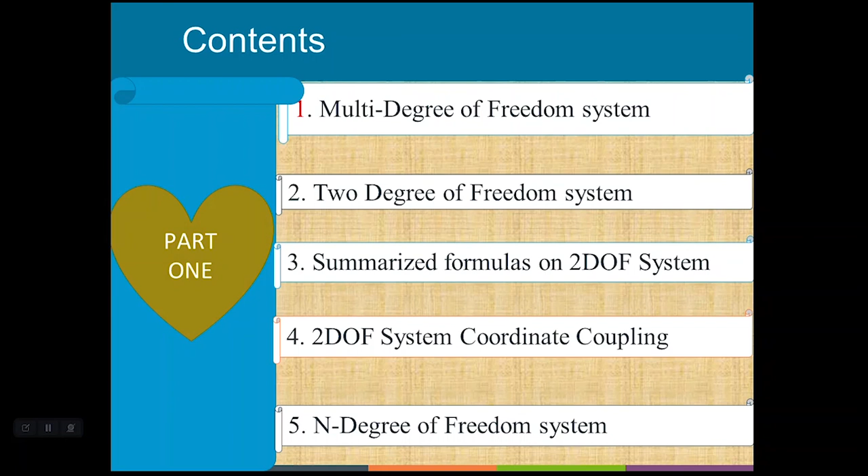If the system requires more than one independent coordinate to describe its motion or to specify the position of the particles, it is called a multi degree of freedom system, or an n degree of freedom system, where n is the number of coordinates required.

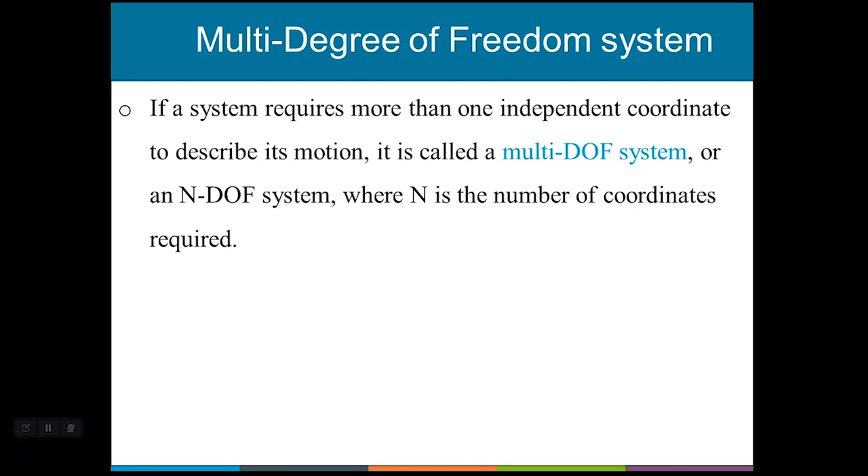For example, let's say x1, x2, x3, x4 coordinates may exist. So based on the number of these coordinates, we can decide either multi degree of freedom system or single degree of freedom system, either 2 degree of freedom system or 3 degree of freedom system. But this is depending on the independent coordinates. So if the independent coordinates or the variables are more than one, these are the multi degree of freedom system.

Multi degree of freedom system example, let's see some examples. For example, 2 degree of freedom system is one part of multi degree of freedom system, and 3 degree of freedom system is one part of multi degree of freedom system. 4 degree of freedom system is another part of multi degree of freedom system.

So let's see the 2 degree of freedom system. For example, here there is a fixed part, and this is free from the right side, but it has m1 and m2, two masses and 2 springs. So due to this one spring and one mass we have one degree of freedom system, and due to this mass and this spring we have another 1 degree of freedom system. So these 1 degree of freedom systems in combination give what 2 degree of freedom system.

And also the next, because we have x1 and x2 coordinates, due to x1 and x2 coordinates it is possible to decide this is 2 degree of freedom system. And for the other one, here we have x2 and here x1. So this mass had 2 directions, in the left direction or up and down. It can move horizontally and up and down. So we have 2 coordinates, or we have 2 independent variables or independent coordinates. So due to these independent variables we have 2 degree of freedom system. So this system is 2 degree of freedom system.

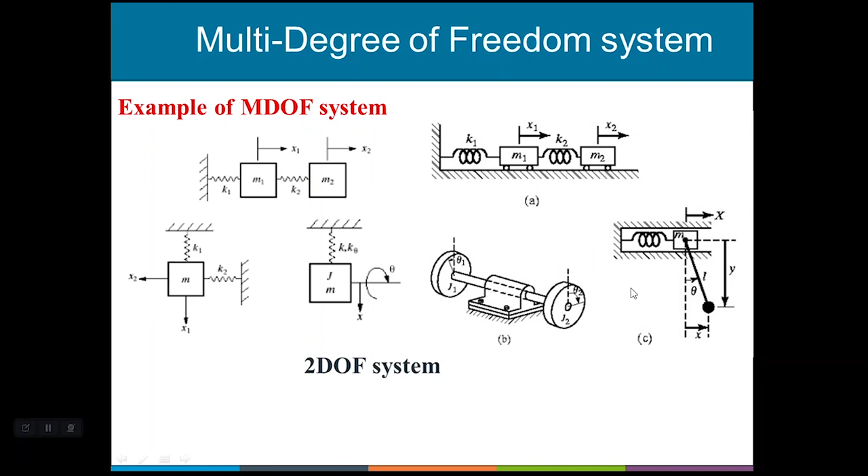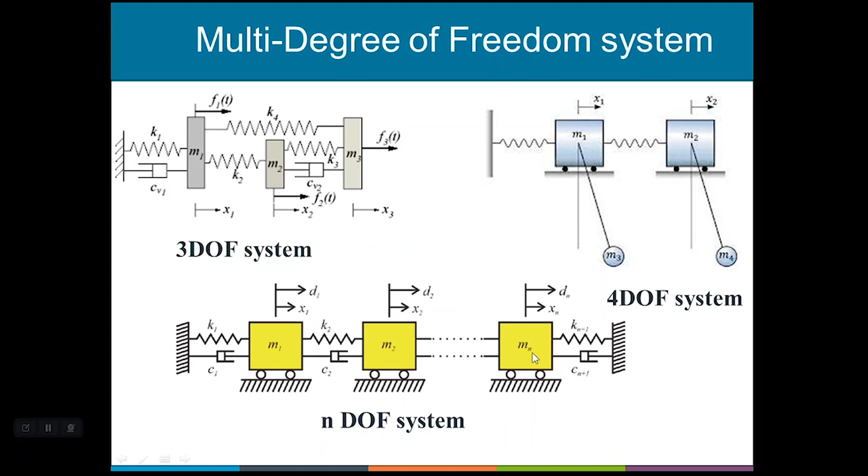Let's see the 2 degree of freedom system, this is part of the multi degree of freedom system. Free vibration analysis of an undamped system means there isn't a damper, so we don't care about the damping conditions. So this is only the mass spring system.

Let's see this example: here there is a spring, then mass, then a spring, then mass, and spring, fixed from both sides.

Write the equation of motion. When the motion is towards the right, due to this, for example, let's see this part m is moving. So due to this the spring will apply a tensile load on m1, meaning the resistance force will be towards the left. Also for this one, because this mass is going to the right, this spring will be compressed if the second mass is stopped at this point, meaning the spring force will be towards the left. When we see 2m, this 2m is going to the right, so due to that this spring will be compressed and this spring will be stretched.

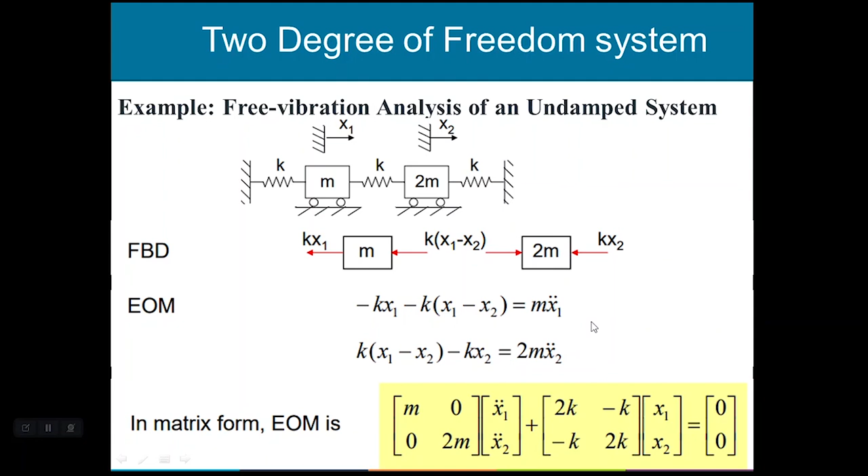For a two degree of freedom system, we have the general equation of motion in matrix form. The general equation of motion looks like this: these are the general masses, here also the damper coefficients, and here also the stiffness coefficients.

That means m x double dot of t, which is the inertial force, plus c x dot due to the damping force, plus kx, which is the spring or restoring force, equals f of t. If f is 0, the equation equals 0. M is the inertia or mass matrix, c is the damping matrix, k is the stiffness matrix, f is the external force vector, and x is the position vector, n times 1.

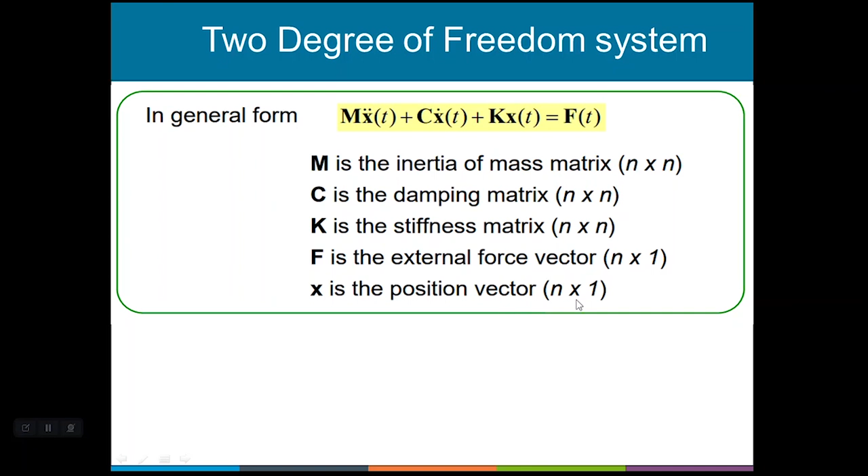Here are the initial conditions. After we calculate or find the different equations, we have to apply the initial conditions to find different constants. Two coupled second order ordinary differential equations with constant coefficients need four constants of integration to solve for a 2 degree of freedom system, and thus four initial conditions on position and velocities. That means to find the velocity, to find the other constants, to find the general solution, we have to apply the initial conditions.

For example, x1 of naught is equal to x1 of naught, x1 dot of naught is equal to x1 dot of naught, x2 of 0 which is equal to x2, x2 derivative which is equal to x2 derivative at initial condition.

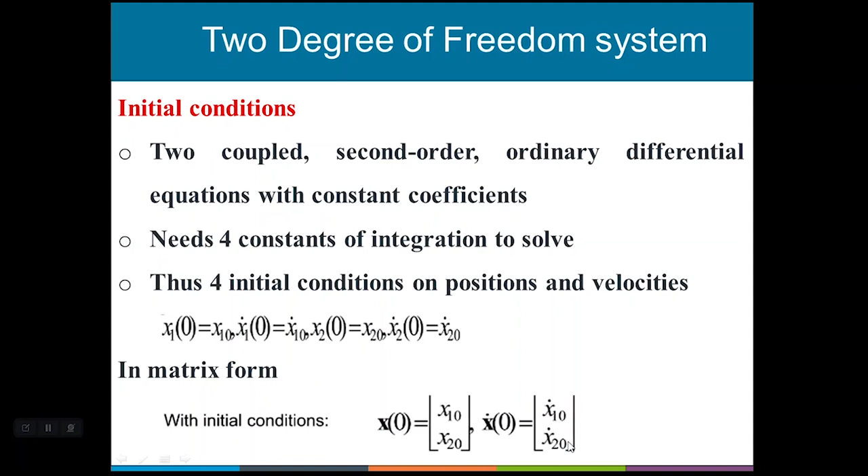In matrix form it also looks like this: with initial condition x of naught, x1 of 0, x2 of 0, x dot 1 of 0 and x dot 2 of 0, because this has two equations of motion.

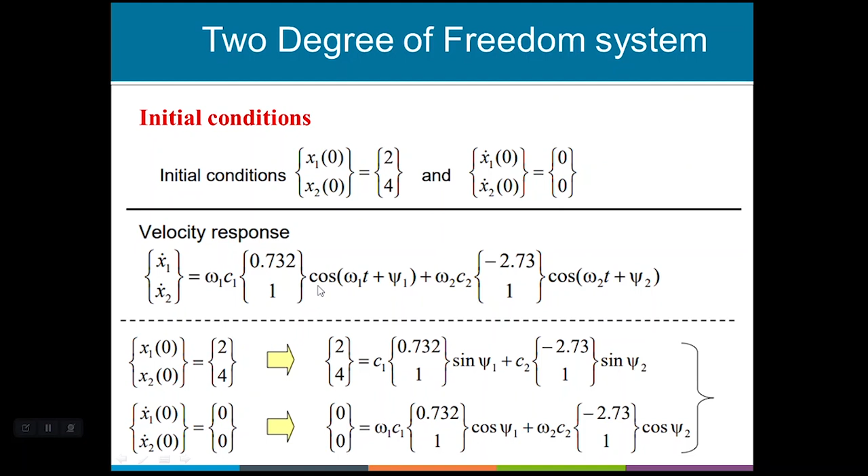Summarized formulas on the 2 degree of freedom system.

The first one, as we see, is the equation of motion. That means m x dot dot of t plus k x of t which is equal to 0. This is the general equation of motion for undamped free vibration.

The motion is synchronous, meaning we have a constant angular frequency and a constant phase angle. x which is equal to a sine omega t plus phi, or a e to the power of j omega t plus phi. This is a synchronous equation.

This is also an eigenvalue problem. To find the eigenvalue, we use these formulas: k minus omega square m, into x of t, which is equal to 0. When we divide this part by x of t, we get the determinant k minus omega square m which is equal to 0.

Omega n square is the eigenvalue, and omega 1, omega 2, omega 3 up to omega n may exist in the system if it has an n degree of freedom.

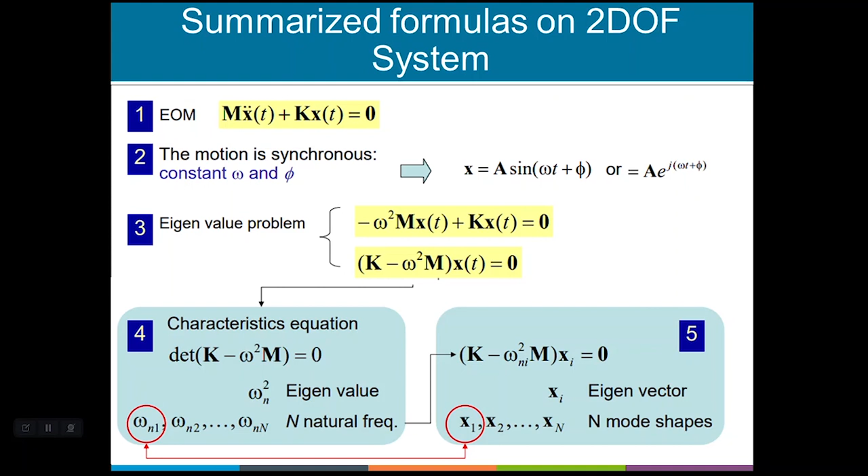And also the free undamped response. For free undamped response, the general formula will be as follows.

Like this: x1 equals a1 sine(omega1 t plus phi1), plus x2 equals a2 sine(omega2 t plus phi2), plus up to xn equals an sine(omega n t plus phi n). Then the general equation is x of t equals the summation from i equal to 1 up to n of xi, ai sine(omega i t plus phi i). This is the general formula.

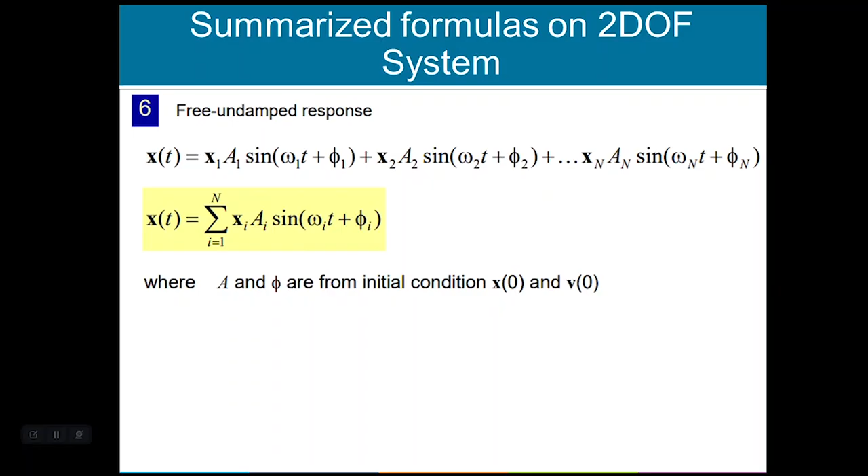So what is coordinate coupling in a two degree of freedom system? The differential equations of motion for the two degree of freedom system are in general coupled when both coordinates appear in each equation. For example, here we see m x1 and m x2, and k x1 and k x2.

If x1 and x2 both appear in one equation, it is coupled, or if both appear in the second equation as well, then it is coupled. That means it is impossible to find the solution individually, using only one equation or one formula alone.

So when we say coupled, in matrix form it will be as follows: for example, m11, m12, m21, m22 into x1 dot dot, x2 dot dot, plus k11, k12, k21, k22, into x1 and x2, equal to 0. From this, if m12 and m21 are 0, or if they are diagonal and equal, it is not coupled.

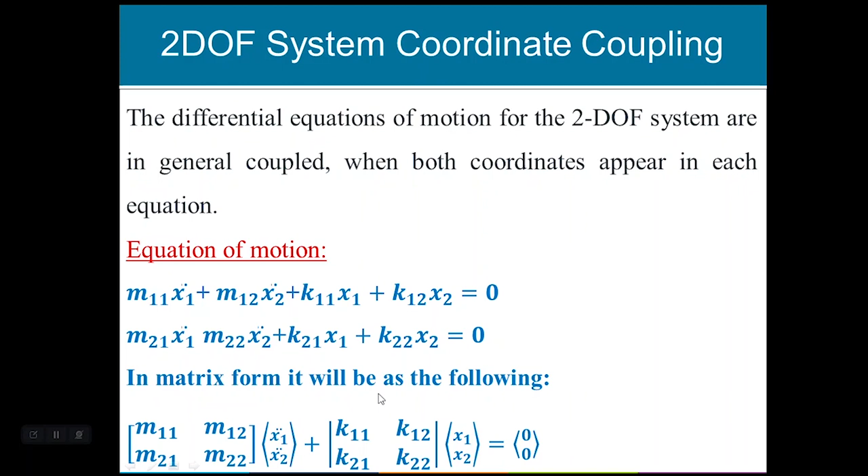Mass or dynamical coupling exists if the mass matrix is non-diagonal. If this mass matrix is non-diagonal, we call it coupled, because it is impossible to solve the problem using only one row. For example, x1, x2, plus c11 - when we look at k11, k22, now it's not coupled, it's uncoupled, because they can be solved independently. But when we look at c11, c12, c21, c22 - if c12 and c21 are not diagonal, it becomes coupled. Only when they are diagonal is it not coupled.

This is a system that has zero dynamic and static coupling, but the coordinates are coupled by the damping matrix. If c12 is equal to c21 is equal to 0, the system equation becomes uncoupled.

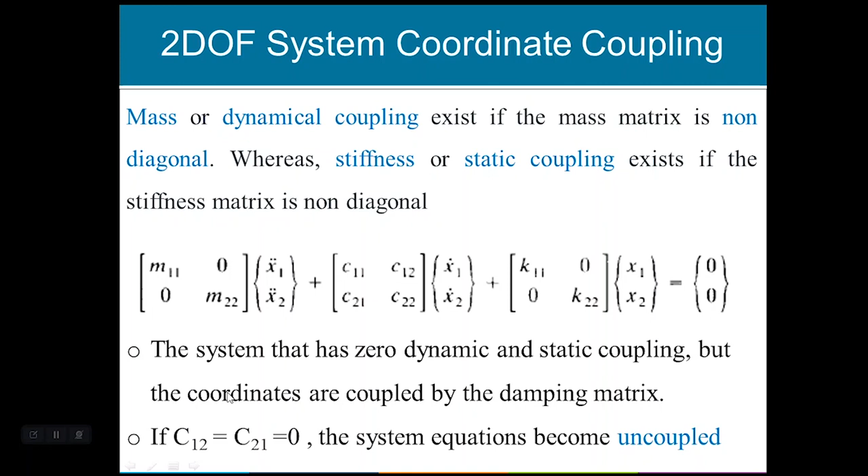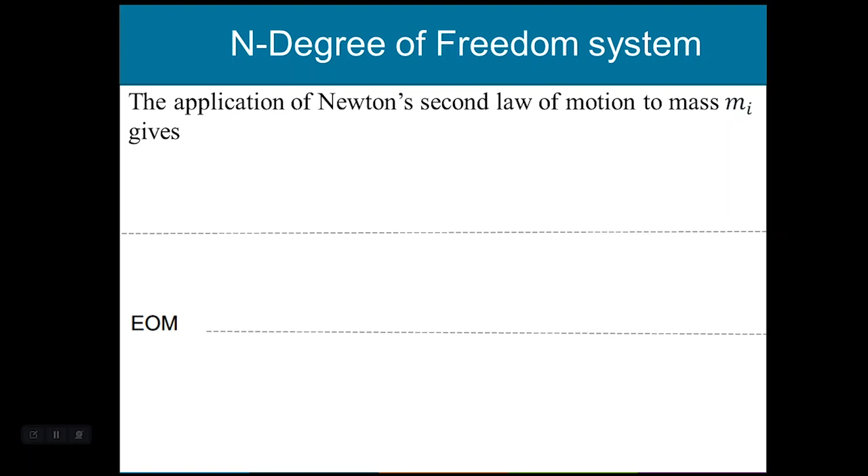The free body diagram, for example, it seems like this: one mi, there is a mass, but for this mass there are tensile forces from both sides.

For example, let's see this part. Let's take M2 or Mi or something, let's say Mi. So for this Mi, we have this spring and this spring. This spring and this spring applies the tensile force for Mi, the tensile force for Mi, because this is stationary, so due to the other mass spring systems, it will move to and fro.

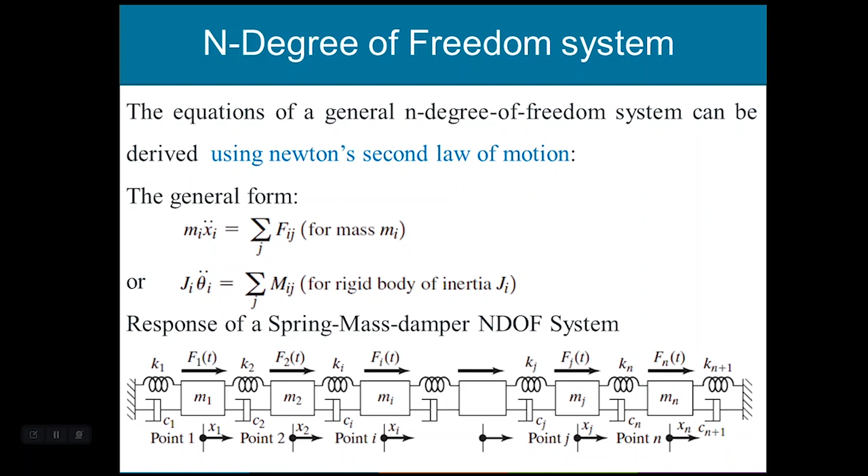So here, because of this, these are the tensile forces towards the left and towards the right. This is a general free body diagram for this multi-degree of freedom system.

And the other one is, we have to find the equation of motion from this free body diagram. That means, for example, for a stiffness, Ki xi minus - towards the left is negative, and towards the right is positive. So due to that, Ki(xi minus xi minus 1) is negative, and Ki plus 1 into (xi plus 1 minus xi) is positive.

And for the damping also, this is negative, and here also this is positive, and the mass is also negative. Then the general formula will be like this.

That means i is starting from 2, 3, 4 up to n minus 1. And the equation of motion, generally we can collect like this - that means the similar terms will be collected into one place, and then we can write the equation again.

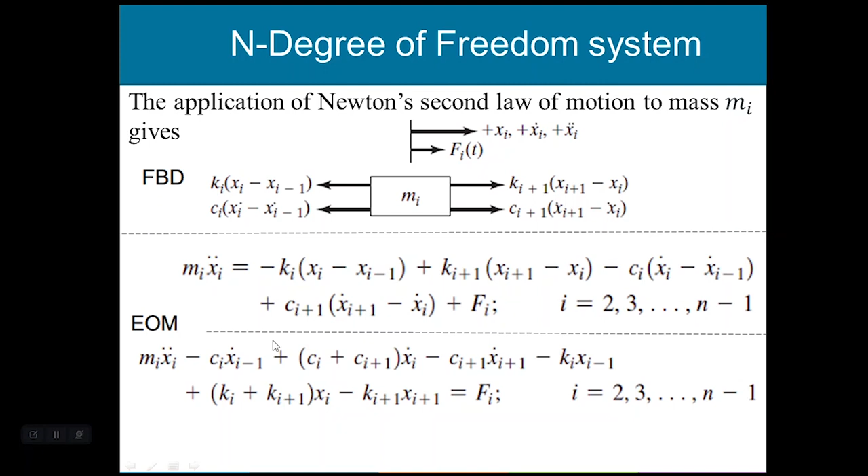So this is already the same, but the only difference is collecting the like terms, collecting the same or like terms. And the equation of motion of the mass m1 and mn can be derived from the above equation by setting i equal to 1 along with x naught equal to 0, and i equal to n along with xn plus 1 equal to 0, respectively.

That means, for example, the first one, when i is equal to 1, we have the equation from this part: m1 x1 double dot plus (c1 plus c2) x1 dot minus c2 x2 dot plus (k1 plus k2) x1 minus k2 x2 is equal to f1.

But when we apply i is equal to n, we have this one. Then the equation of motion can be expressed in matrix form like...

m x double dot plus c x dot plus k x, which is equal to f. This is a vector, or all are vectors, but this is double dot, and here single dot, and here without dot. This is a general formula which is equal to force. This is a general formula for any degree of freedom system in matrix form.

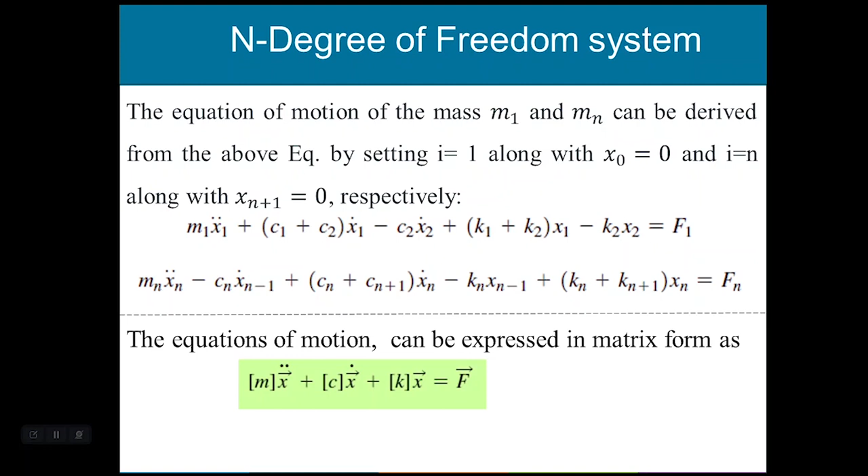Now we can continue part 2. In part 2, we have to discuss what about the vibration controls. If there is a vibration, how can we control this vibration? There are different methods, different mechanisms to control the vibration of the system.

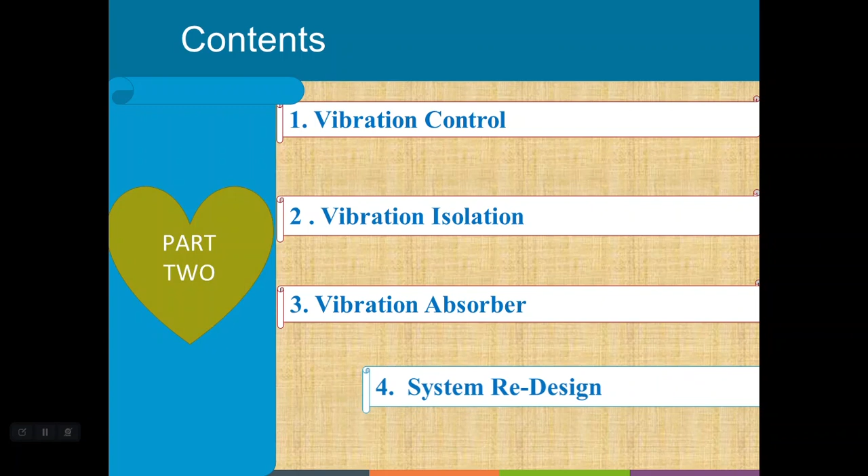In this case, we will include some pointers. The first one is vibration control. What means vibration control? The second one is about vibration isolation, one mechanism of vibration control. The other one is the vibration absorber, and then the redesign of the system. These are the basic important parts.

So what mean vibration control? There are several techniques that can be used to reduce and eliminate the shock and vibration response of mechanical systems and structures. From these mechanical systems, we can use some strategies to reduce the vibration problems. Some strategies include control of excitation - this is the external force, the control of external vibration force which comes from the sources. For example, the balancing of machine.

And the second one, vibration isolation. This is a reduction of forces transmission to the machine by using some isolators. We have to reduce the source or the transmission of the forces from one part to the other part, because there is isolation in the middle part between the two systems.

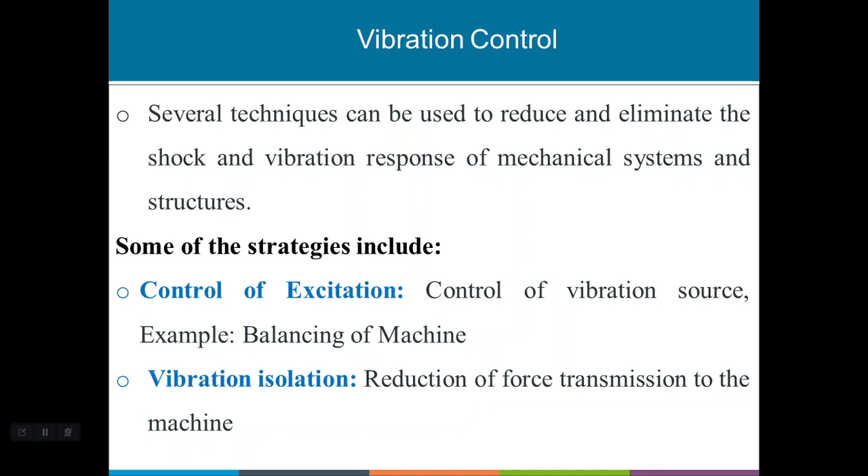And the vibration control - vibration absorber system. This is very interesting and important, which controls the system configuration. For example, change of system order with a vibration absorber - that means we will add some other vibration absorbers. For example, there may be some system, and if there is a problem of vibration, we will add another vibration absorber. That may be the same material or the same system, but it must reduce the vibration of the first system.

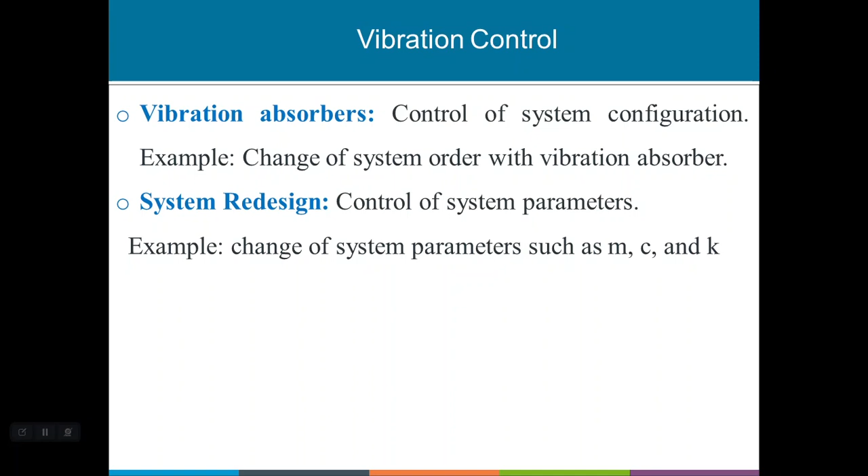System redesign. This is very important to control the system parameters, for example, the mass, the damping system, and the stiffness. To control these parameters, we will redesign the system and reduce the vibration of the total system. Change of system parameters.

Let's see the vibration isolation. Vibration isolation is the process of isolating an object, such as a piece of equipment, from the source of vibration. That means already reducing the force of vibration which comes from the source and transmits to the other machine elements. The control is analyzed in terms of reducing the vibration displacement transmitted through the base motion, or in terms of reducing the force transmitted by the source through its mounting point.

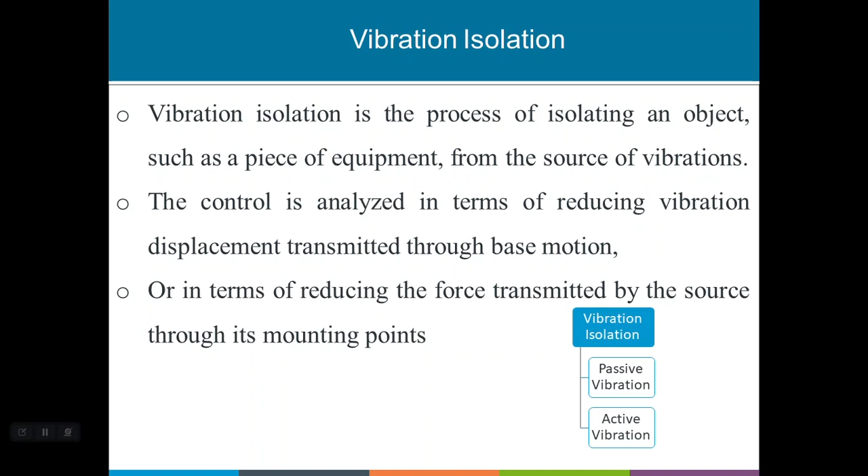But this vibration isolation is divided into two: the first one is passive vibration, and the second one is active vibration isolation system. What mean passive vibration isolation system and active vibration isolation system? Passive vibration isolation makes use of materials and mechanical linkages that absorb and damp these mechanical waves.

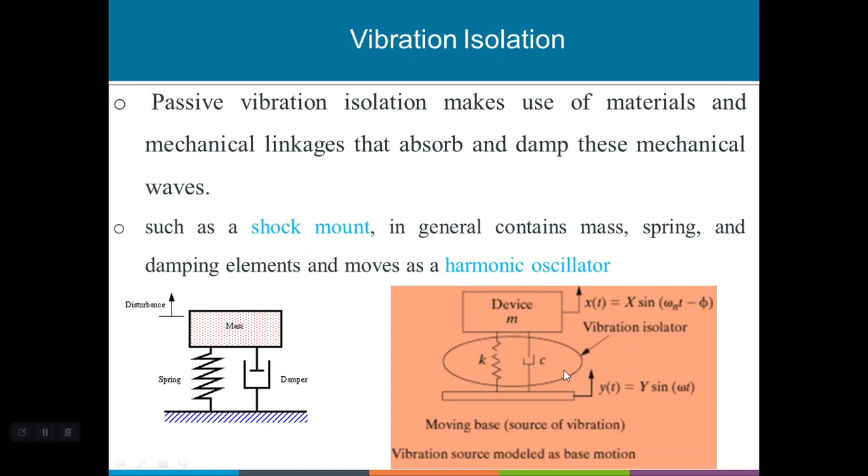Active vibration isolation involves what sensors? For example, the piezoelectric accelerometer or geophone, a controller, and an actuator.

This system gives feedback immediately when the vibration starts. This is active already. That produces a destructive interference that cancels out the incoming vibration immediately when it starts.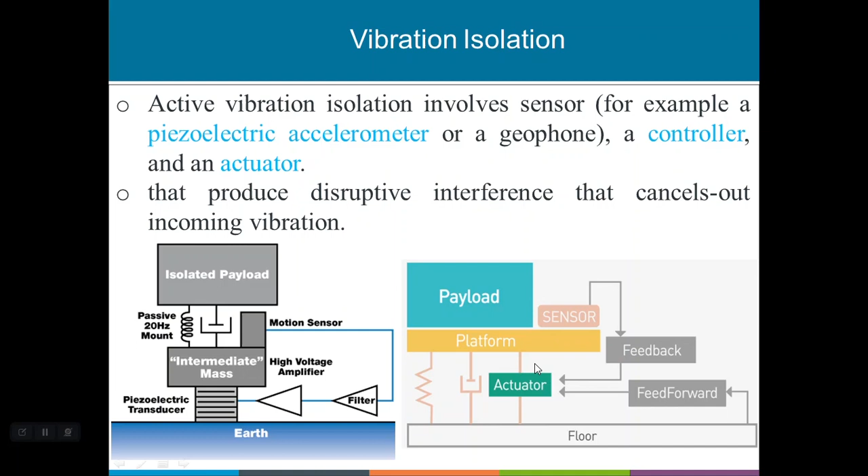So immediately when there is a force and the vibration starts, this sensor will apply its action to control the vibration of the system. This is also like that. There is a sensor here, and here feedback, then it gives information for the actuator, then the actuator immediately actuates and reduces the vibration of the system.

Vibration absorber. What does vibration absorber mean? This is the second part. Vibration absorber protects a device from steady-state harmonic disturbance at constant frequency. In this case, the frequency is constant, and it is a steady-state harmonic motion. So the disturbance of this steady-state harmonic motion is controlled by using the vibration absorbers.

It consists of a second mass-spring combination or second mass-spring-damper combination added to the primary device to reduce or remove the vibration. That means we will add another mass-spring system or mass-spring-damper system to reduce the previous vibration, or to remove the vibration which occurred previously.

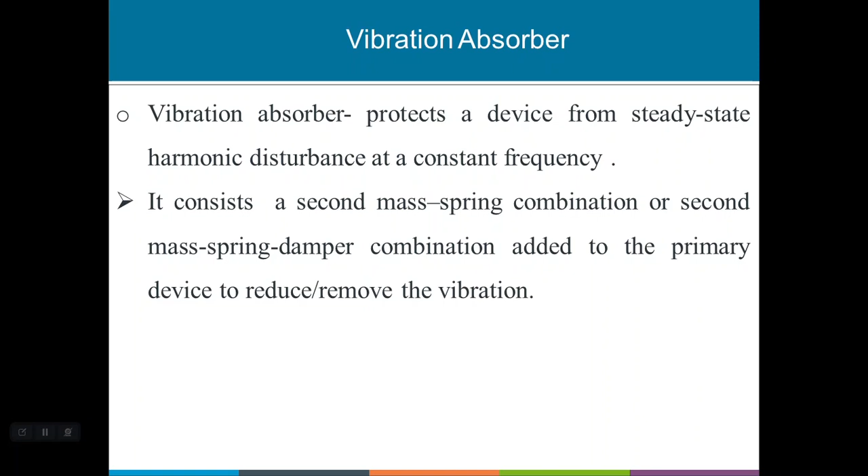For example, let's see here. Assume this is already stopped here, and a main mass here, F naught sine omega t here, and the absorber is also here. The first part is this one, only the blue part, main mass, and here we have F naught sine omega t, and here there is a spring. But because of the vibration problem, we have to add another spring-mass system to control the vibration.

So this, for example, is the equilibrium part. This is another part due to external mass-spring addition, and here also external mass-spring addition, here also mass-spring addition. But in this case and in this case, the springs and the masses are totally in motion. Here also totally in motion, but the middle part, only the last spring and masses move, because this is already in a stable condition due to this external mass and spring.

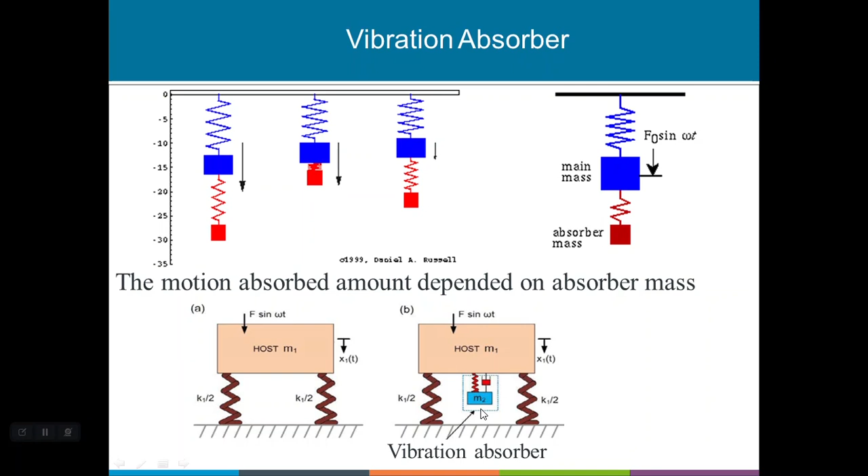This is vibration absorber. What is system redesign? System redesign is making changes by creating and adding new content to the structure and function of a vibration system, so as to better serve the purpose of the original design, or to serve purposes different from those set forth in the original design.

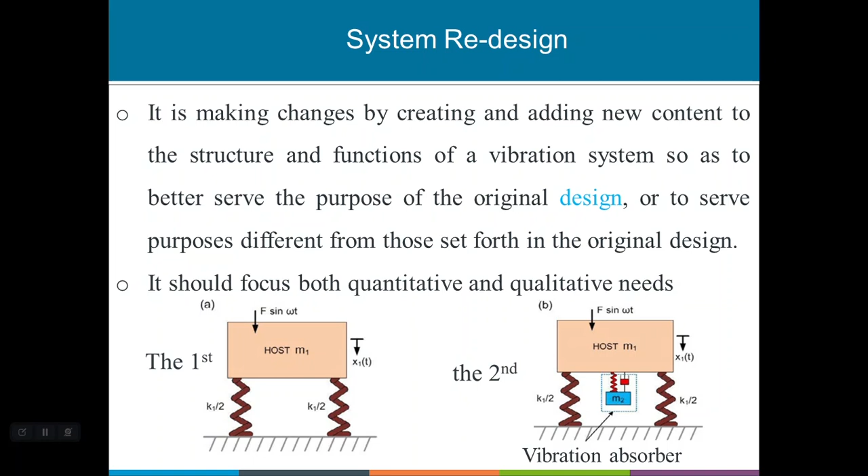System redesigning has some steps of redesigning processes. The first one is to define the vibration system process. First of all we must define it, and then analyze the vibration system process; the defined vibration process must be analyzed again. Then identify which is the problem, and analyze improvement opportunities to find opportunities to improve that. Then design future state processes—we have to start the design situation or the design condition.